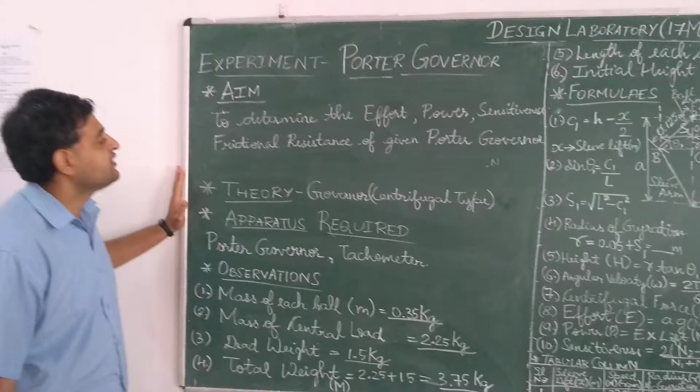Students, in this experiment we are going to see about the Porter governor. So the aim of this experiment is to determine the effort, power, sensitiveness, and frictional resistance of the given Porter governor.

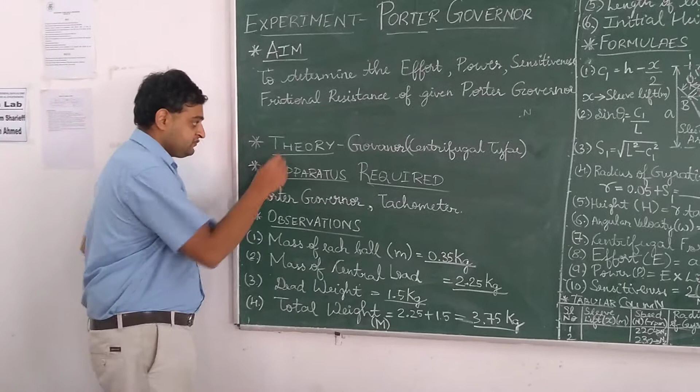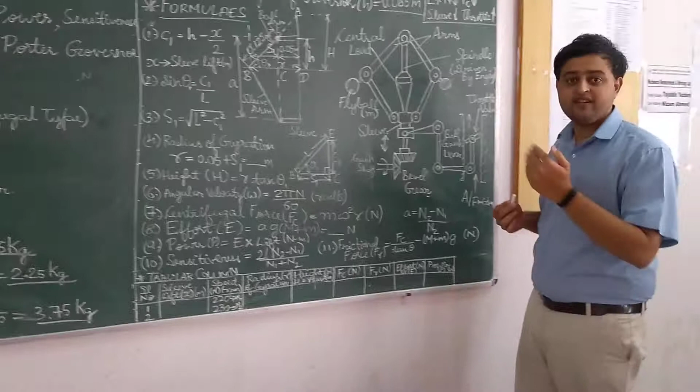Before going to the experiment, we need to understand what is a governor. A governor is a device which is used to control the speed of the vehicle at a constant rate. With respect to variation of the load, the speed of the engine must remain constant. That is the function of the governor. So how is this achieved?

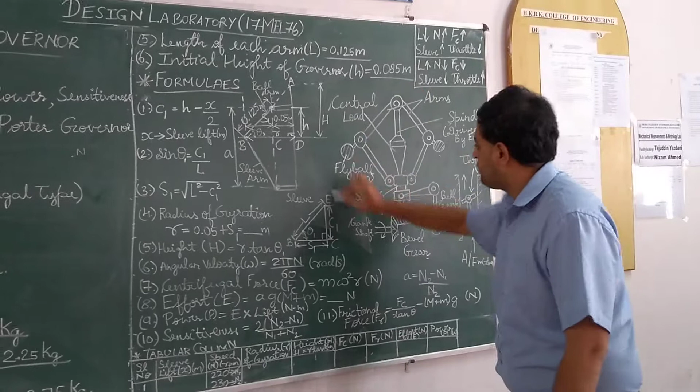This is called the Porter governor. I will be just explaining you the parts first. Initially, there is a bevel gear setup which is run by the engine crankshaft. This is connected to the spindle which powers the unit.

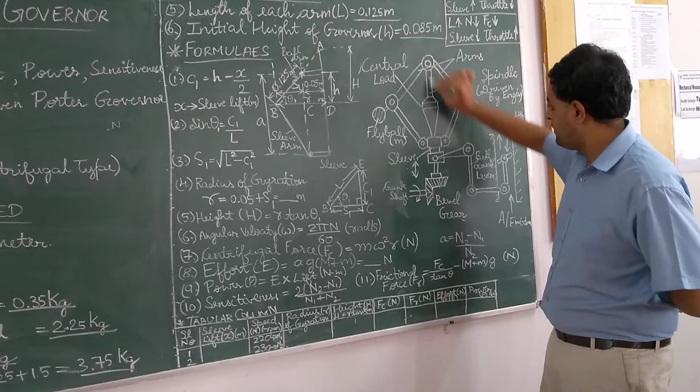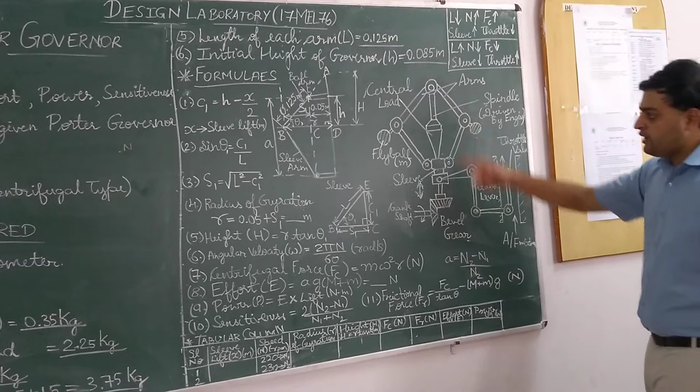This is called the sleeve. The sleeve is able to move up and down due to the centrifugal force produced by the fly balls on either end. There is a central load which keeps the sleeve in position. Now the sleeve is able to move in upward and downward direction due to the centrifugal force created by these fly balls.

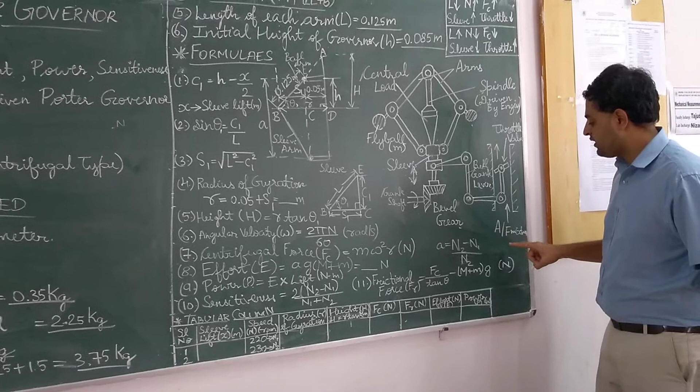This sleeve is in turn connected to the bell crank lever mechanism, which will control the throttle valve. The throttle valve is the valve which controls the air fuel mixture into the engine. Now we will understand how does this work.

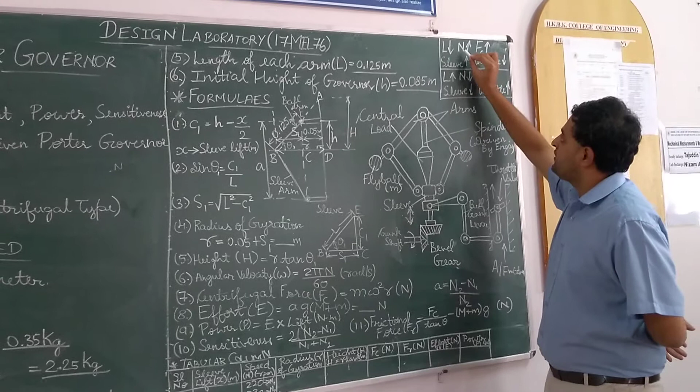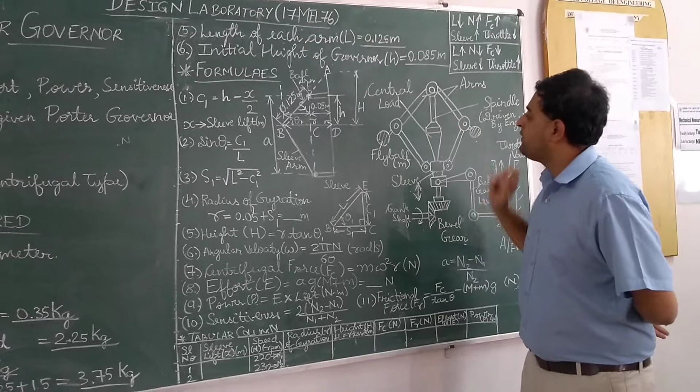As the load on the engine decreases, the speed of the engine will increase, in turn the spindle speed will increase, which will in turn increase the centrifugal force produced by this fly ball. So the centrifugal force will also increase, and the sleeve will move upwards.

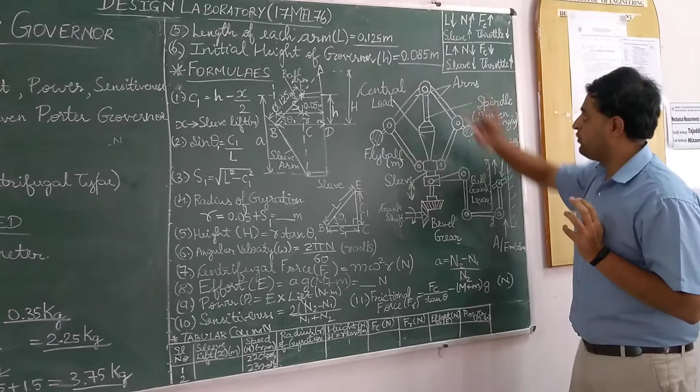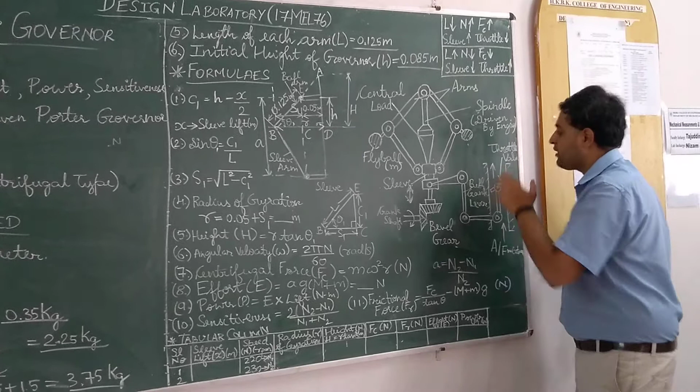Once the sleeve moves upwards, the throttle will come down, so there is a reduction in air fuel mixture supply to the engine, thereby balancing the speed. So the speed will remain constant.

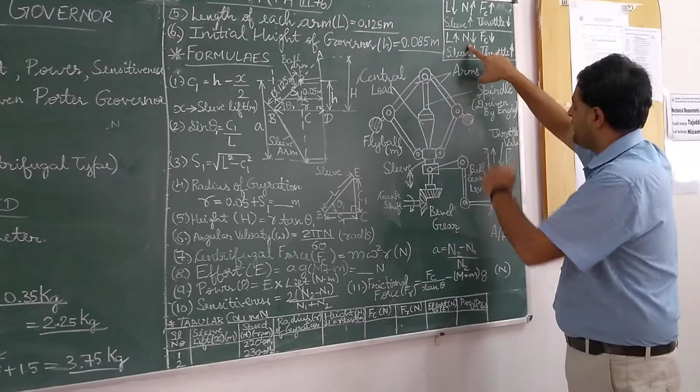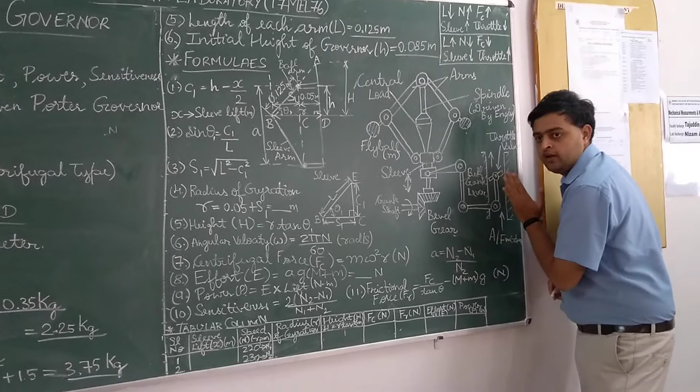Now if the load increases, what will happen? Load on the engine will increase, the speed will reduce. This will in turn reduce the centrifugal force produced by the fly balls. So then the sleeve will move in downward direction, the throttle will open to increase the air fuel supply so as to maintain a constant speed. That is how the Porter governor works.

So with this, what is the apparatus that we require to carry out the experiment? A Porter governor and a tachometer. A tachometer is a sensor which is used to find the rotational speed, in RPM.

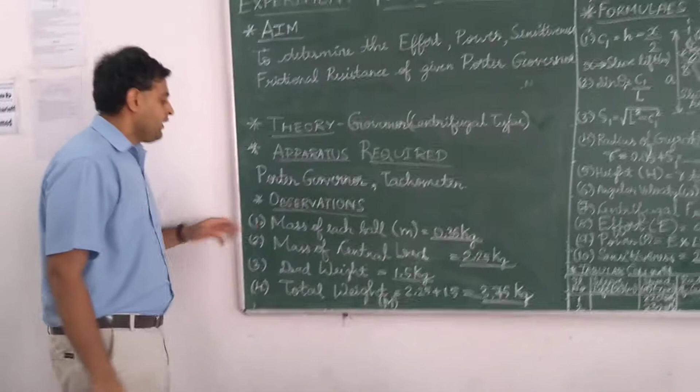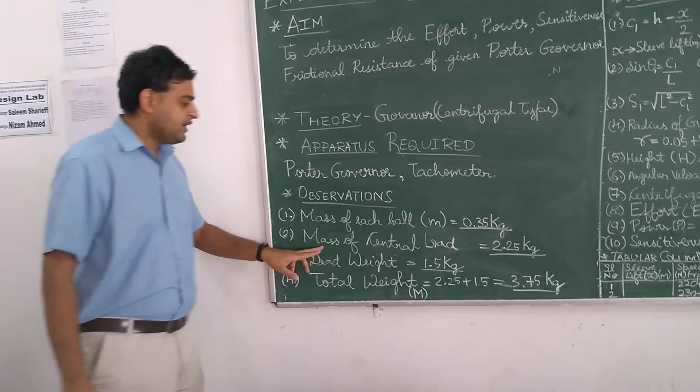So what are the observations? We have two fly balls. The mass of each ball is noted, denoted by small m, which in our case is 0.35 kg. Then we have a central load here, the mass of the central load is 2.25 kg.

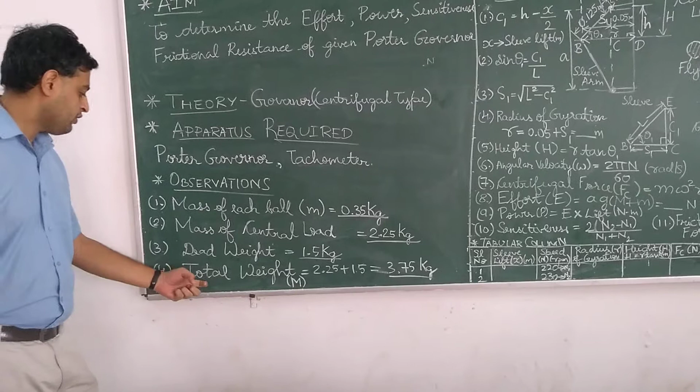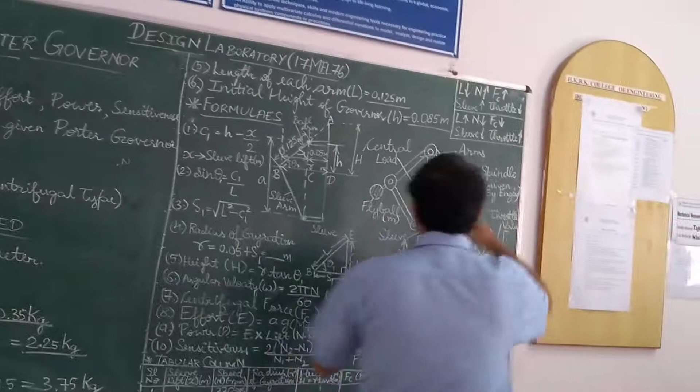The dead weight is 1.5 kg. So therefore the total weight will be denoted by capital M, which is the sum of central load and dead weight, that is 3.75 kg. Then we have the length of each arm, that is 0.125.

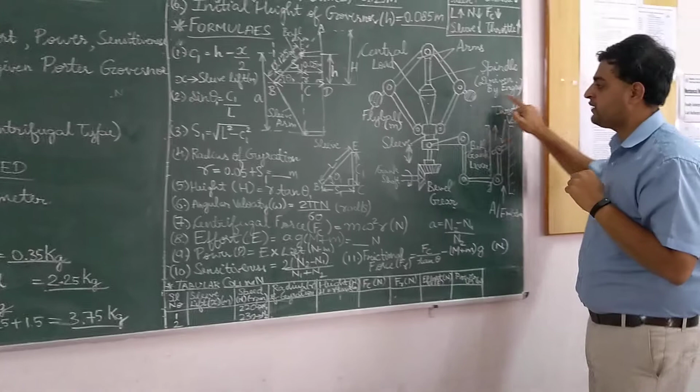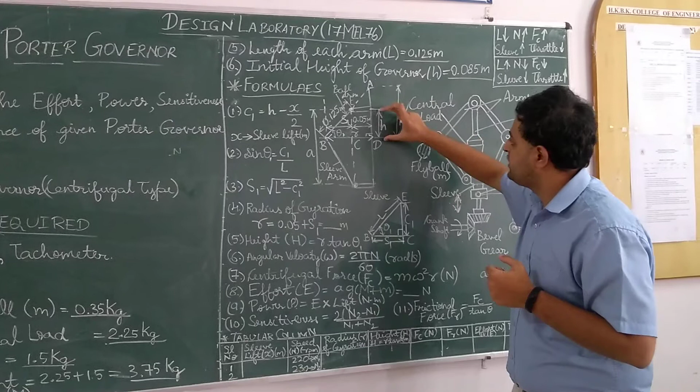This is the arm, this is the spindle, these are the arms. The spindle is driven by the engine, as I told earlier. So length of each arm L is given by 0.125 meter. The initial height of the governor h is given by 0.085 meter.

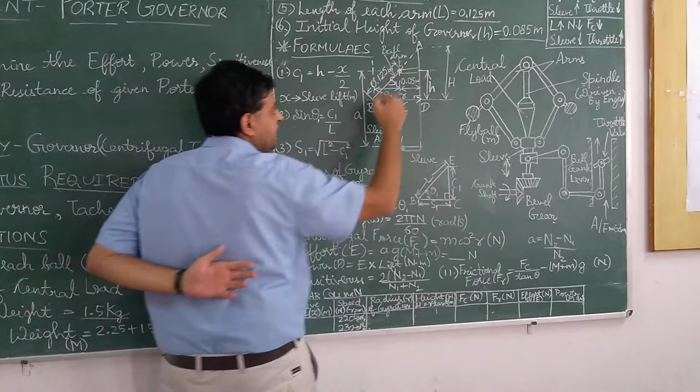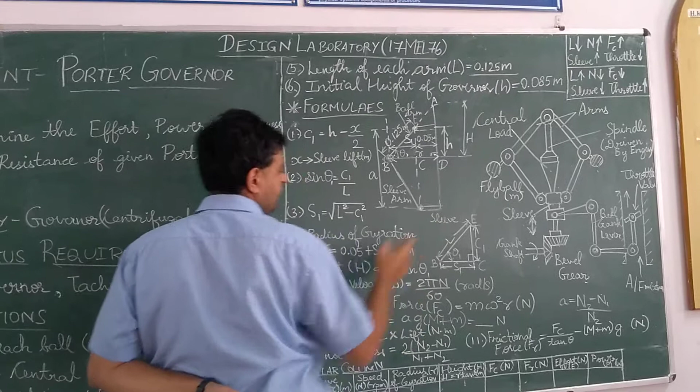So then we see the formulas. The same diagram I have written here. Here we have the fly ball at point B. This is the top arm, this is the sleeve arm. We have a right angle triangle here, whose height is h.

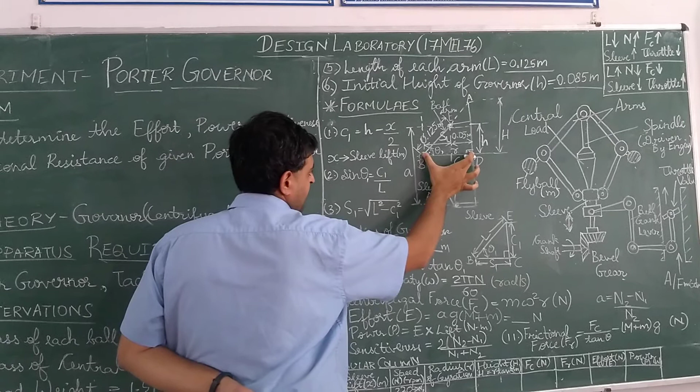Then we have up to the sleeve it is small h. Then we have the distance r, that is called the radius of gyration from the center spindle to the fly ball center, that is the radius of gyration. Then the length of the arm is 0.125 meter.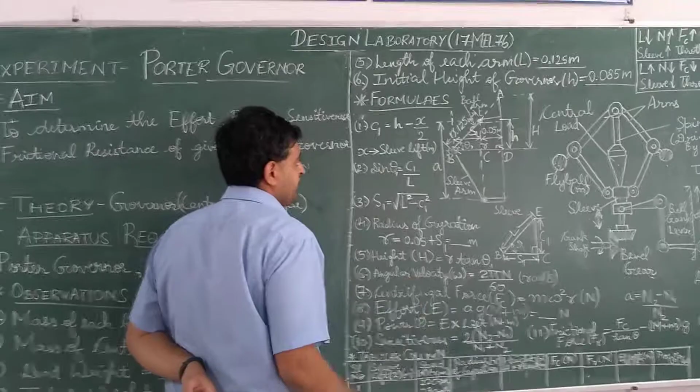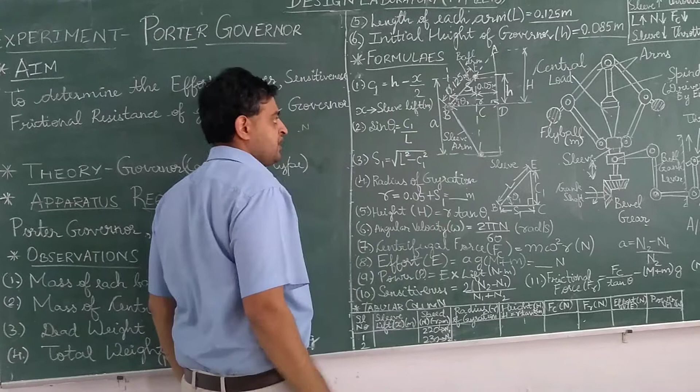So here we will see the formulas now. C1 is h minus x by 2, where x is the sleeve lift that is produced, which we determine from the experiment. So then from the diagram...

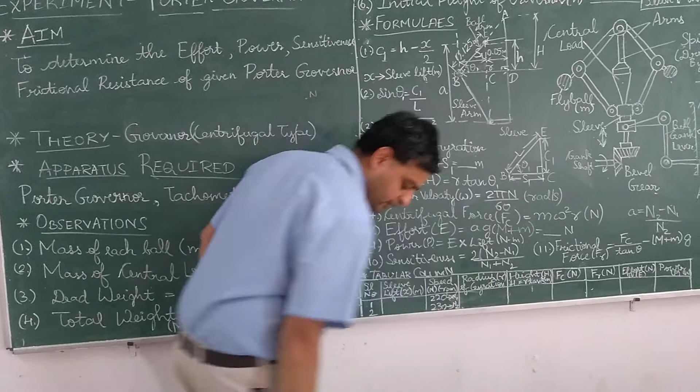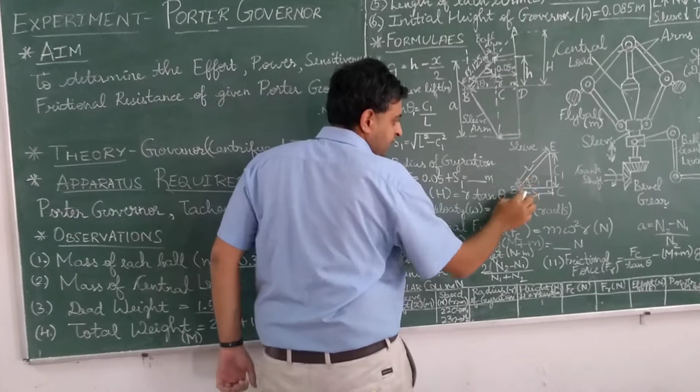Take this triangle BEC, right angle triangle BEC. This angle is θ1. Here you have the fly ball. This is the L arm length. S1 is the distance, C1 is the distance on this side.

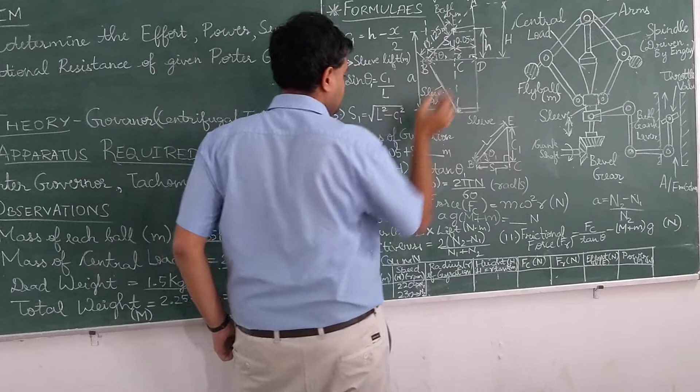So we have the formula sin θ1 is C1 by L. S1, how will you calculate? Square root of L square minus C1 square. So the radius of gyration from the diagram you can see that it is S1 plus 0.05. That will give you the value of radius of gyration. The height h is given by R tan...